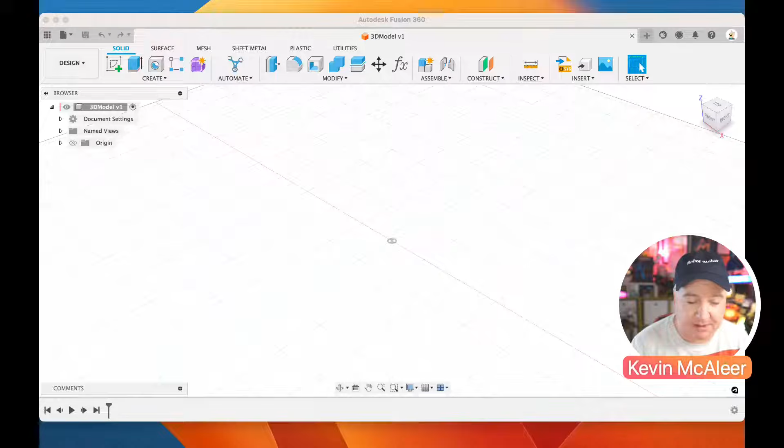So what I'm going to do is create a new component first, and I'm just going to call this one case, something simple like that. Oops, why did that go wrong? Let's try that again. Assemble new component. There we go, case.

Okay, and I'm just going to create a sketch on the base there. What I'm going to do is create the basic outline of our remote control, something like this. I only have to be crude because we're going to stitch all this together. So let's make that nice and vertical and use the midpoint to pin that to the middle there.

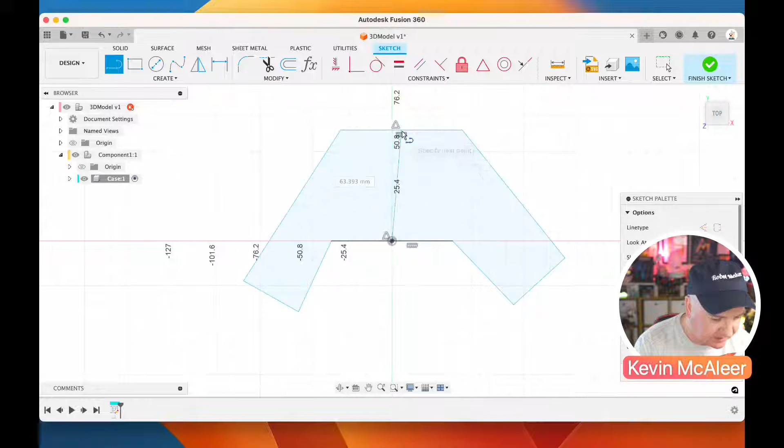And the first measurement I'm going to do is also just draw a horizontal line, not a vertical line even. Oops, it's decided to make that go all the way up there. No, we want that to come down like so. Right, and I want the measurements—these are just rough and ready measurements, something I've tried and tested. So this is going to be 57.6 millimeters. Because that's at the midpoint, that also means that point to that point is also 57.6.

We can put that there as a driven measurement. The next one there is going to be 80, and that one there is going to be 30, a bit smaller, and then this one here is going to be 40. I want it at an angle like so. And then what I'm going to do is basically mirror these over, so that is equal to that, that is equal to that, that is equal to that—that's the equals constraint there. And then let's have a look what else we need.

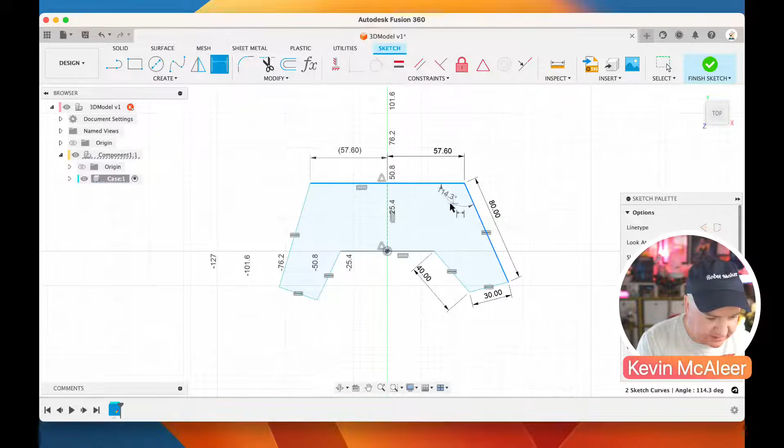We need to define some angles. So the angle between that and that is going to be 120, and that's going to be the same there, so that's going to be equal to that. And then we're going to have that angle between this one and this one be 105. I think that should therefore be the same, 105. Yep, that's a driven one, that's fine. We can leave that.

And I think that is almost it. What do we need to do? We need to define the height of this as well. So let's do there to there—this is going to be 75. There we go. Right, now that all the lines are black on the outline there, we've got a profile, which means it's a fully defined model. I'm going to round these corners out, but I'll actually do that as a second step in a minute.

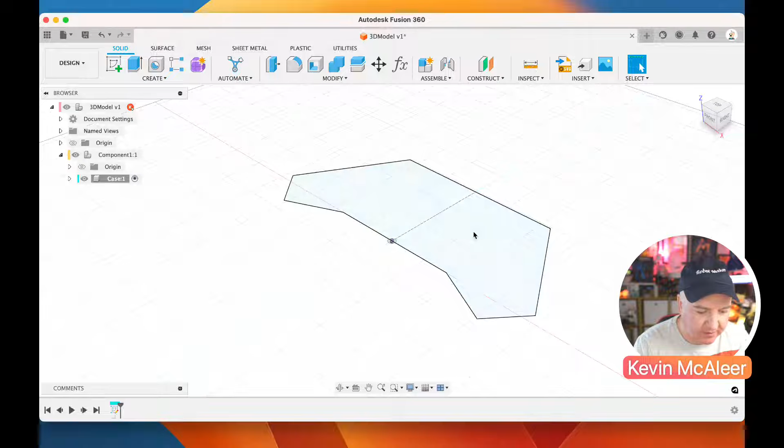So now that we've got that there, I'm just going to click on the profile, hit E to extrude, and I'm going to extrude up. Let me just see what the measurement is. I've got my notes next to me. I spent all day basically preparing my notes here. Right, so I'm going to do this 20. So it's a nice big block.

And then what we'll do next is we'll do those fillets. So if I press F and I basically just click on these, the fillet's going to be 10. So we get a nice round. If I'm holding down the Alt key there, I can actually sort of see through the model. So I can click on things that would otherwise be a bit obscured. I'm just going to move that around a bit there just to get that back one. There we go. So I've now got a nice rounded, kind of like this shape.

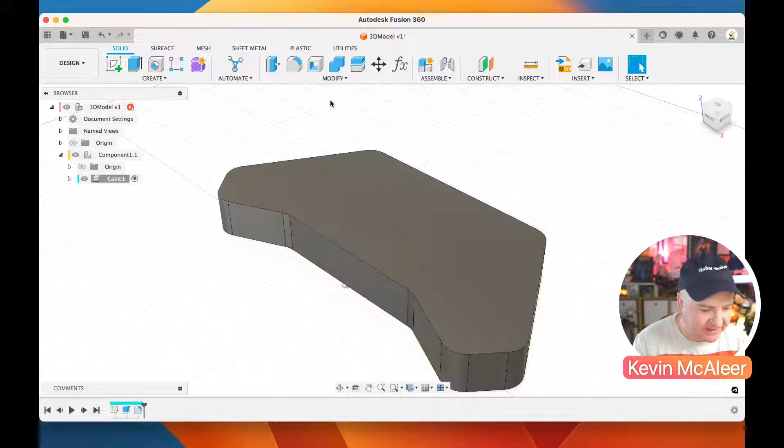And the next thing that we need to do is we need to be able to sort of eat into this. We need to give it a shell. So if I click on that shell, click on that top surface and give it a 3mm shell, it's now a hollowed out case. Very, very similar to this one that I've got in front of me here. I think that's probably about 3mm on there as well.

Okay, so what I want to do next then, let me scroll down here. I want to create another sketch inside this base here. This is what we're going to use for the basis of our PCB design. So if I click on Create Sketch in there, I then press P for Project. I'm going to pick the outline geometry, which is here. I click OK. We've now got that on this particular sketch layer,

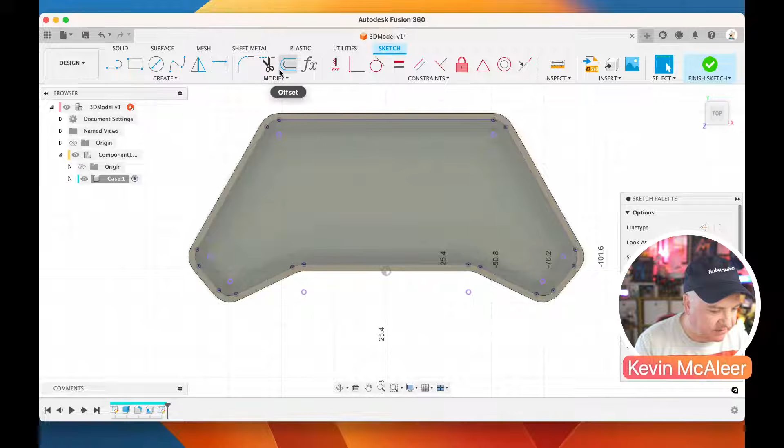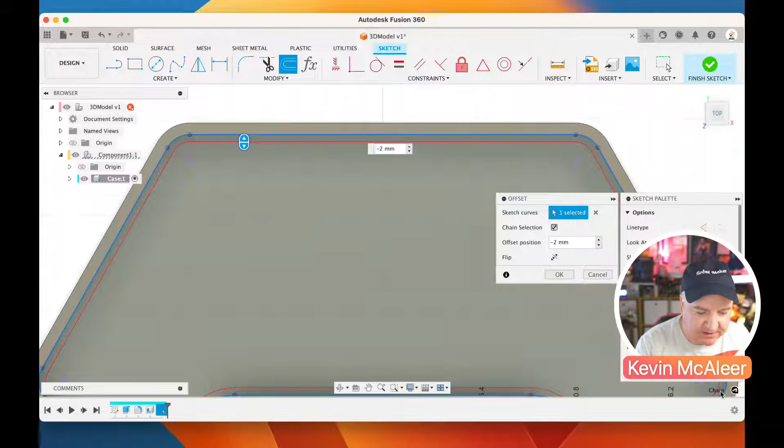and if I click on this offset and then select the edge there, I can then give this, say, I think it's a 2mm offset. And we need it to be -2, so I can click that little flip button there. And what that's actually done is it's created a new outline 2mm within the boundaries of that, so it's offset it that way. So let's click on OK there. And let's finish our sketch.

So this profile that we've got here, this is what we're actually going to turn into our PCB board. So the way that we do this, we click on the create here, we go all the way down to the bottom and we say create, and I'm going to create an associative PCB. And what this will do is it will link it back to this particular sketch. Now the only side effect of that is we can't actually place the finished PCB within this particular model. We'd have to create another model, bring this one in, bring in the PCB model and assemble them that way. It's not a big shakes to do that.

But the benefit of doing the associative is if I decide to change the dimensions of this base sketch, it will change the dimensions of the PCB. So it's got that link there. Whereas the independent one, it is a completely independent sketch and not related. It's just kind of a snapshot in time and then that's it. So I like to do the associative PCB. So it's going to say it requires saving the source. So I'm going to save that. Click OK.

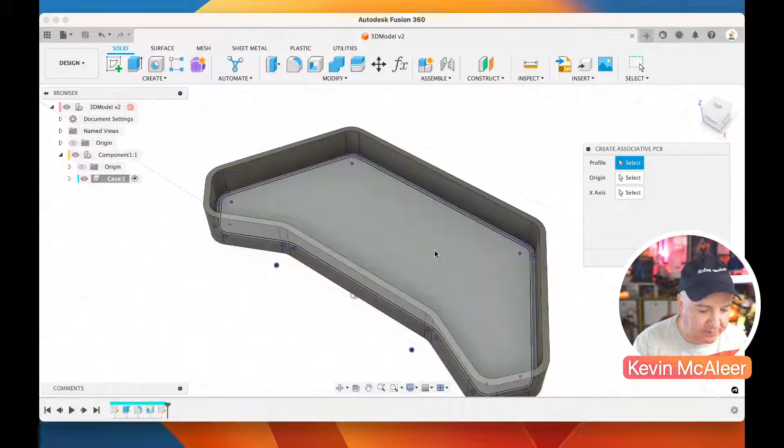And then what we then need to do is we need to define some orientation for this. So this little create associative PCB, so the profile, I'm going to click in there. So that's the offset profile that we've created. The X axis is going to be this bit here. So you can see that we have the X going along that way. However, our Y is pointing in the wrong direction. So I think we just need to flip the X, do we? Actually, no, that will be fine. So I'm just going to click OK on there.

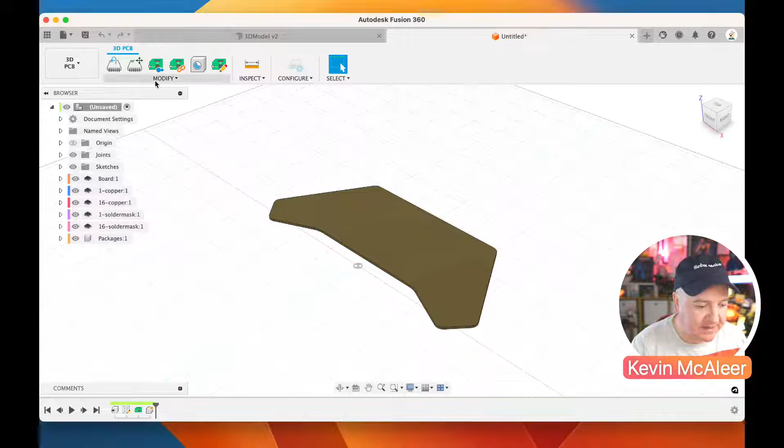That's done. And this is now gone into the electronic design part of Fusion 360. So this is what our PCB is going to look like. You can see on there, it's got copper traces, it's got solder masks and packages, but there's nothing in there yet because we haven't built them. So let's go and do that. So the way that we do this is we push this 3D design to a 2D design. So this button here will push this, and it doesn't exist at the moment.

So I'm going to click yes to create that, and then we'll go into the Design Studio proper. Now it looks a bit overwhelming at first, there's all kinds of buttons and things you might not have seen before. Don't worry about that.

We're going to go through this a bit at a time. So what I'll do is save this at this point. I'm going to click on save and just call this PCB. That's fine. You can see it says the 2D and 3D PCB documents are out of sync. Don't worry about that, it's just because it's been created and there's nothing in there yet.

Now down the bottom we have these controls for zooming in. The one I use most often is zoom to fit, and that will just zoom to fit there. Now I think that's actually upside down, so I'm going to go back to my other design.

Where is it? The 3D design. I'm going to click on... well, actually no, I'm not, I'll leave that for now. But basically, when I said the X was pointing the wrong direction, or the Z, it's essentially just done it upside down. It doesn't really matter for what we're doing today.

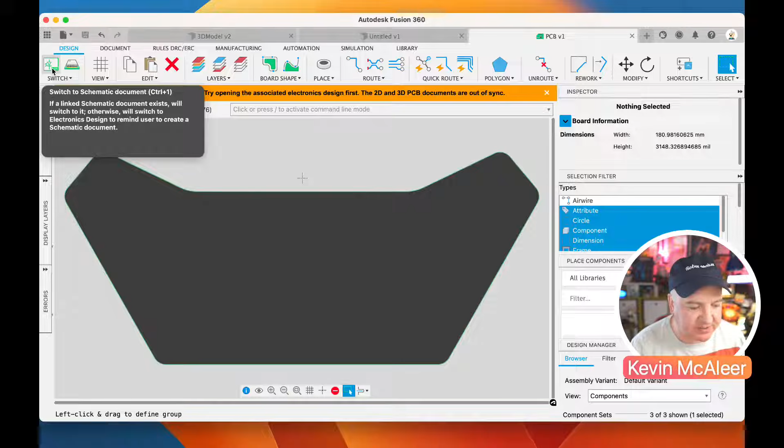So let me look at what we need to do next. We need to now create the schematic, so I'm going to go over here and click on switch to schematic drawing. Now it doesn't have one, and it'll complain that we don't actually have one created yet. So what I need to do is go and create a new electronic design.

If I go up to new electronic design, it will create a new blank document. Now this is kind of like a binder that holds all three documents together - it'll have the 3D model, the 2D model, and the schematic in there. So what I need to do is create a new reference to a new schematic.

Let me find where I'm up to here. So I'm going to reference the PCB design - see this button where it says reference the PCB document? If I click on that, I then go to the place where we've saved this. We call this one PCB live stream, and we can link those two together, and now we've got that linkage there.

So if I now click on switch to schematic document, it now knows what to do. And if I go back to that document with the 3 tabs - there we go - you can now see we've got the board layout, the schematic which hasn't got anything in it, and our 3D model which we haven't looked at yet either.

Okay, so I'm going to go back to our schematic. I'll be jumping backwards and forwards, just bear with me, this is how we do it. Right, let me just get rid of that. Just need to put myself into do not disturb. There we go. Okay, good, you can't see that.

Right, so I'm going to save this. Let me go back to that version there. I'm going to click on save - we'll just call this one Electronics Design Remote Control, something like that. That now means we've got everything saved, just in case Fusion 360 crashes, because sometimes it does do that and it's quite irritating.

Okay, so what we're going to do next is create our schematic. We're going to put in some components, some buttons, and the Raspberry Pi Pico, and a power connector, like a JST PH connector, for example.

So let me just scroll up a little bit. I've got a box of the kind of buttons I want to use here - these are momentary tact switches, you might have seen these before. I don't know if I can get that to show on camera, but these are very small little push buttons, so I've got a whole box full of those, that's what I want to use. You can either have surface mount ones or through hole. I'm probably going to use through hole for this entire build because it's just easier for me to solder - I don't have all the fancy air guns and things for surface mount.

Okay, so what we're going to do then is put the buttons onto the PCB, onto this sketch here.

We're also going to create our own Raspberry Pi Pico because that doesn't exist in our library yet. So I'm going to show you how to do this. So over here on the left hand side, we've got this idea of libraries. If I click on this little library manager button here, you can see that we have quite a few different libraries that we can pull things from.

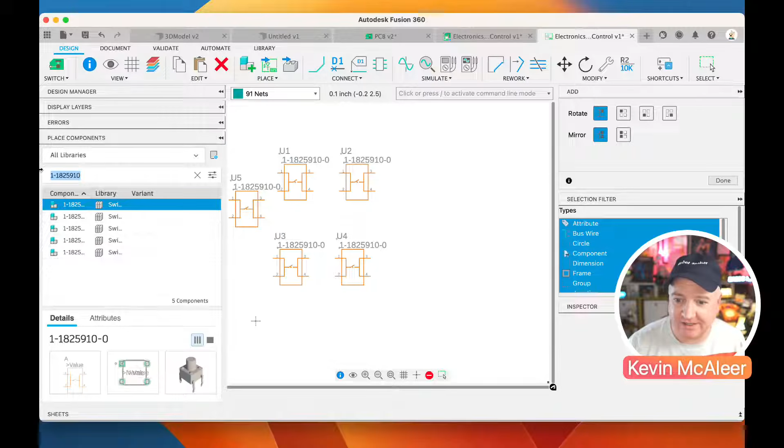So the first thing we want to do is create what they call a library. A library stores components. So I'm going to click on New Electronic Library. We've got these different views on this library here: components, symbols as it calls them, footprints, and then the packages. So let's start out with the component. We're going to create a component, and we're going to call this one Raspberry_Pi_Pico_W. And that's going to represent this Raspberry Pi Pico that we have with our Bluetooth controller on it.

Okay, so now that we've created that, we need to build some symbols for this. See these buttons up here, we have new component, new symbol, new footprint, and new package. So I'm going to click on new symbol. I'm going to call this one similarly Raspberry Pi Pico W. So now in this little symbols tab, you can see that we've got this Raspberry Pi Pico. Right, this is where it gets really cool.

So what we want to do is we want to place 40 pads or pins for the Raspberry Pi Pico. The way that we do this, we will click on this button here that says pin at the top. We click on that, we get this line, and it has a line and a dot and a label at one end. I usually do them spaced apart, sort of 2 blocks. And you can see that there's this grid settings down here.

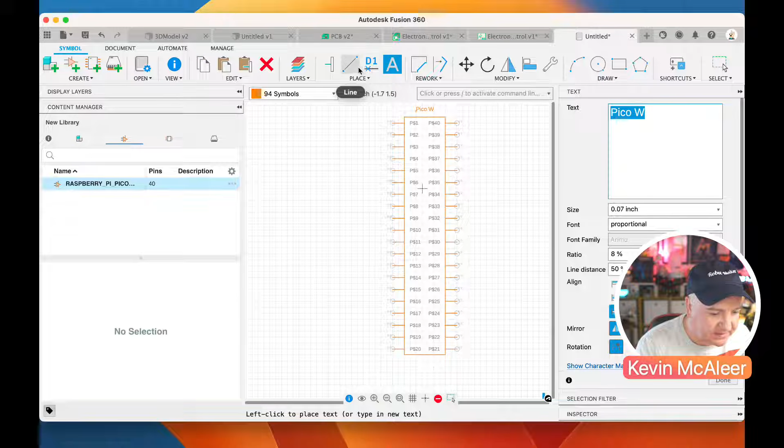Right, so what we need to do next is name the pins so that they actually make sense in the context of the Raspberry Pi Pico. So if I click on this name button here, this D1, and I click on that thing there, I can actually then start to name these. So instead of it being P$1, I can actually call this one GPIO 0, because that's what it is on the Raspberry Pi Pico. And then I can do the same, so that's GPIO 1, and see, it's automatically suggesting the name there.

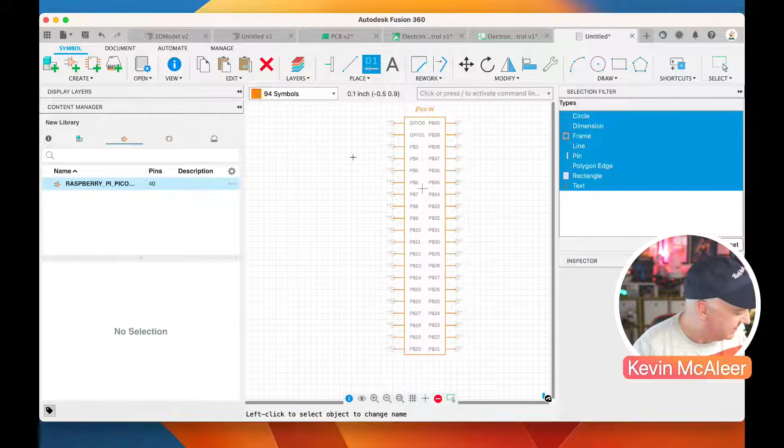So this next one is actually a ground pin, so it's going to be GND. The next one is going to carry on with the GPIO numbering. So if I just press that there, we get GPIO 2. And then it goes all the way down to GPIO 5. So let's just quickly speed run this if we can. This is the kind of boring bit. And then that one is GPIO 5. Then we have another ground pin. So it doesn't matter at this point that it calls it ground 1. That doesn't really change anything at this point.

So this is going to be GPIO 6, GPIO 7, GPIO 8, and then GPIO 9 is the last one before there's another ground. Then we have another ground pin, so this is going to be ground 2. We can actually just jump ahead and put the grounds in. That might be a bit easier. That's going to be ground 4, ground 5, ground 6, and then that one's going to be ground 7. Okay, so that one then needs to be GPIO 10, I think. Yep. GPIO 10, GPIO 11.

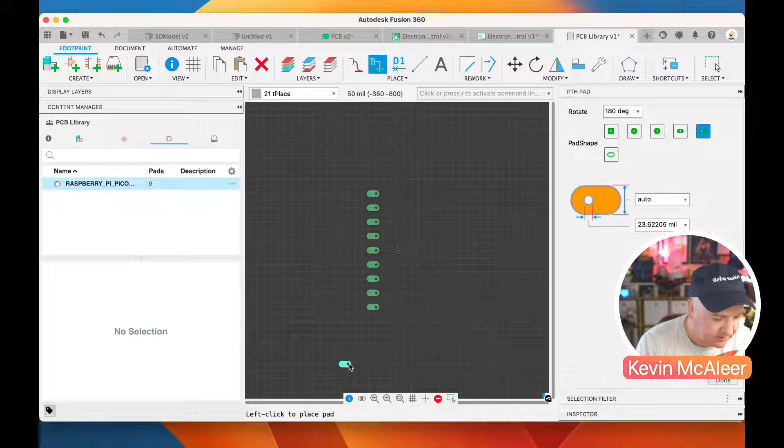Now, unfortunately, it doesn't actually number these, so I'm going to count them up. So we've done, what's that, 5, 6, 7, 8, 9, 10, 11, 12, 13, 14. Let's just do that, and then that. 14, 15, 16, 17, 18, 19, 20. Let me just count them again. 5, 6, 7, 8, 9, 10.

Right, that's 10. Now that X there, that crosshair, that's the origin point, and it is actually quite important that we have that origin point somewhere that makes sense. So I'm going to have that origin point as we look at our physical PCB, on the bottom edge in the middle there.

So that means I need to press escape to get out of that pad placing. I'm going to select all these, and I'm just going to move them up so that they're kind of like that there. Again, if I press zoom to fit, we can see how that's going to look.

Now I need to do the exact same thing with pads on the other side. I need to make sure that they're flipped the right way round. I think they are there, so I'm going to guess it's about there.

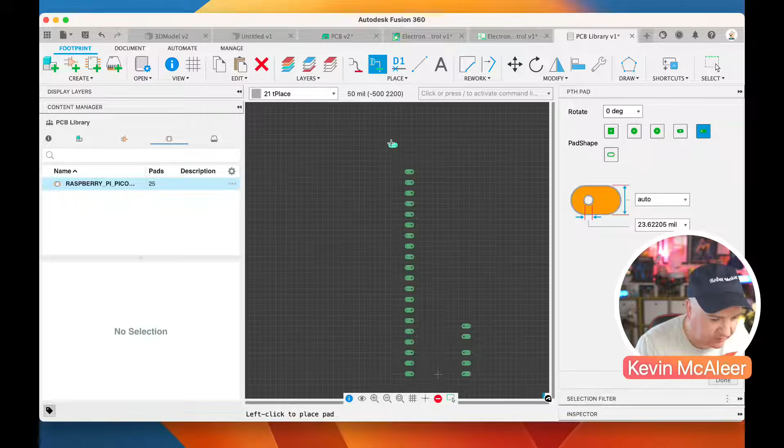I always get the spacing wrong, but we're going to come back. I did that one wrong as well, so we can use that move tool to just grab it and move it like so, and then just move that one there. And then let's just grab that and move that as well. There we go, I was clicking in the wrong place there. So that should be there.

Right, let's get back to placing these, and then we can get on to doing the next bit. So there we go. Nearly done, 2 and then 1. Okay, so that's our pins.

So I'm now going to save that. Let me just click on save. And we want to next create the package. Make sure I've not missed any steps out there. No, that looks good.

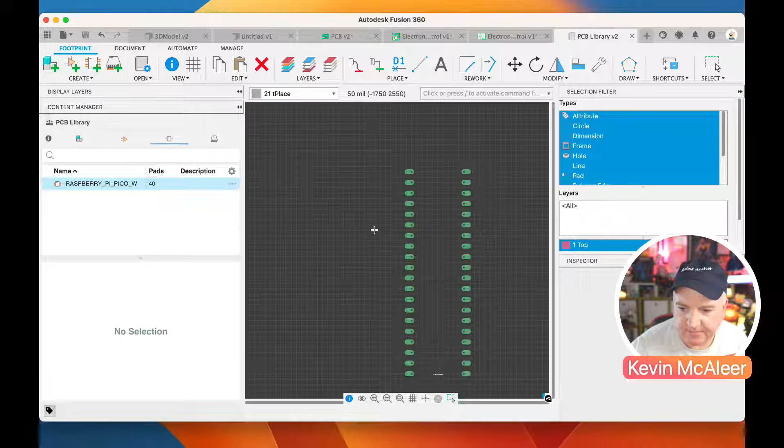Okay, so we just need to create a package next. The package sent me into the 3D Studio. And now at the moment, thanks Bryce for subscribing to the channel. I'm just going to hide off the overlays for a second because I find them a little bit distracting. There we go.

Okay, so we haven't actually got anything interesting to put into the package on this side at the moment. So what we can do is, if we were designing say a PGA or a BGA, a ball grid array, we could click on that one. If we were creating a chip, we could click on that button there. But we're not doing that. We're doing something a bit more fancy than that.

And what we're actually going to do, we're going to cheat for the 3D model. Raspberry Pi have already created the 3D model, so we're actually going to go over to the Raspberry Pi website and grab their 3D model so that we can very simply put this on our screen. So let me just go over to the website.

Let's go to raspberrypi.com. If I go to hardware, let's click on that and go for hardware. I'm going to find the Pico, which is there, and if I scroll down to this document section here, you can see they have these step files. So there's a step file there for the Raspberry Pi Pico W. If I click on that, it will actually download the step file.

And if I come over to Fusion 360 and I go to File and Upload, I can upload that file. So if I go to Select Files, if I find it in Downloads, if I find that step file that we just got, you do actually have to unzip the step file. But if I just go for... is it called Step?

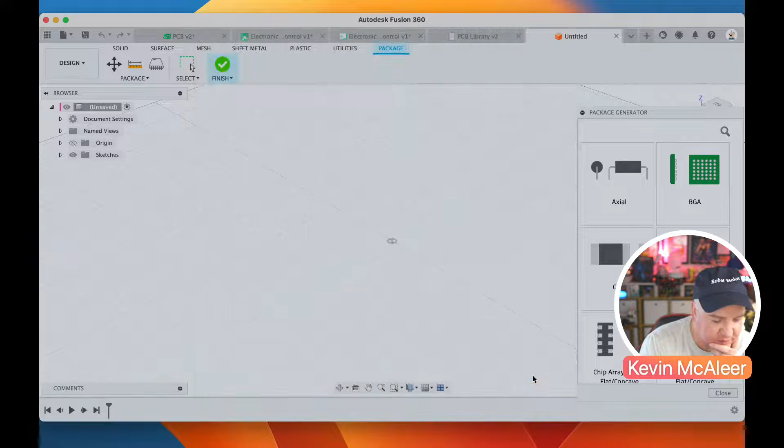So let's try, let me just try uploading the zip file. I don't think that actually works properly, but what I'll show you is you basically just upload the STP file. If I go over to here's one I prepared earlier, and I go into here.

Then we have this Raspberry Pi PicoW file, and we can actually import this into our design. So if I click on Insert into Current Design, I actually have to save the design before I can insert something. So let's call this one PCB 3D model. I should have called it Raspberry Pi 3D model to be fair, but let's just insert this into the current design. And we've now got the Raspberry Pi PicoW.

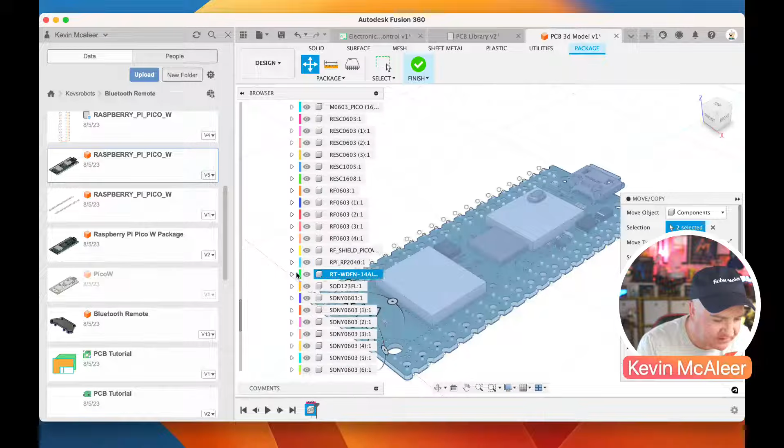They've got this really weird artifact that I noticed on here. That block there shouldn't actually be on this model. I think it's a mistake. So if I go here and just find it, there it is. If I just disable that, that's actually what the Pico should look like. But I'm going to place that there.

I'm going to click on Finish for now. And what we need to do is go back and close that, and do some extra steps on here, I guess. Right, so...

Yes, so I think what I should do, instead of doing the new package, if I go back to... let me find, here it is. So I was saying a bit before about this gets a bit cluttered. I'm going to collapse that one there. It's this one here I'm actually interested in. So if I go back to our Raspberry Pi Pico and I create a new 3D model from there, that's really what I should have done.

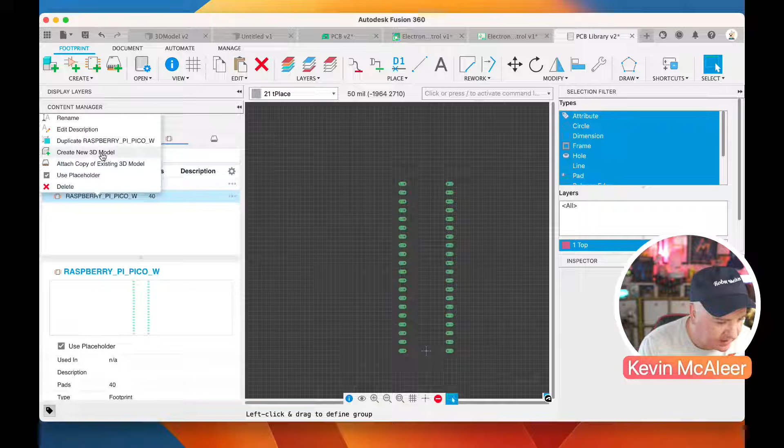I'm going to click on Save. You can see here, these are the pads that we created a moment ago. So this is really where we should now import that Raspberry Pi PicoW into our drawing. So let me do that. And that will tell us whether I've got the spacing correct.

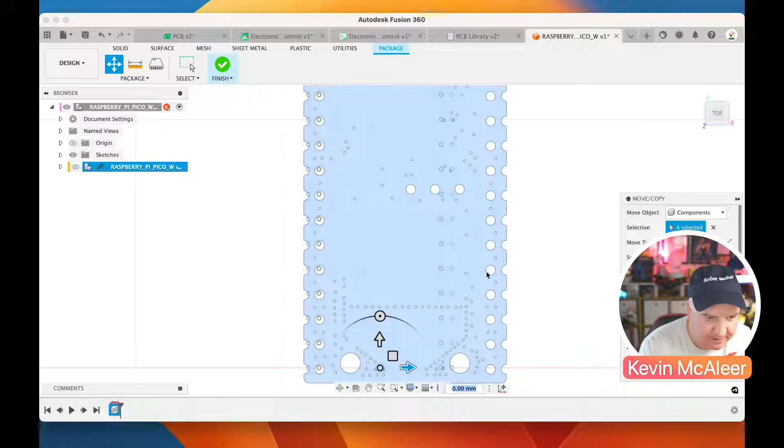So if I go to the top view, I want to see these are not correctly aligned, and maybe they're not correctly spaced. So I'm just going to move this model about until they fit like so. Let me have a look. So yeah, I can see that if I hide that model, these pads here should actually be a couple of blocks that way.

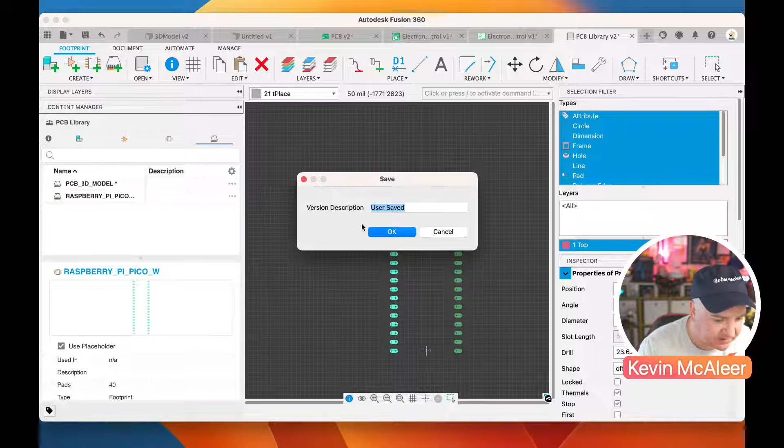So what I will do, I'll just say OK for now. I will go back to our 2D model, and I'm just going to grab these and just move them like so. I'm just going to move them in the opposite direction as well. That might be correct, so let's just save that. I'm then going to go double click on our 3D model.

I think we go back there. We can now go back to the top and see if these now correctly align. They're nearly there, I think they need another push across. The thing that's confusing me is I brought in this model here and it's already got those pads on it, and that's not great.

So what we're probably going to do is just remove that. Let's just delete that and then bring a nice fresh one in. So let me find the Raspberry Pi PicoW. Is that the one that we brought in? Let's try that one, let's insert into current design.

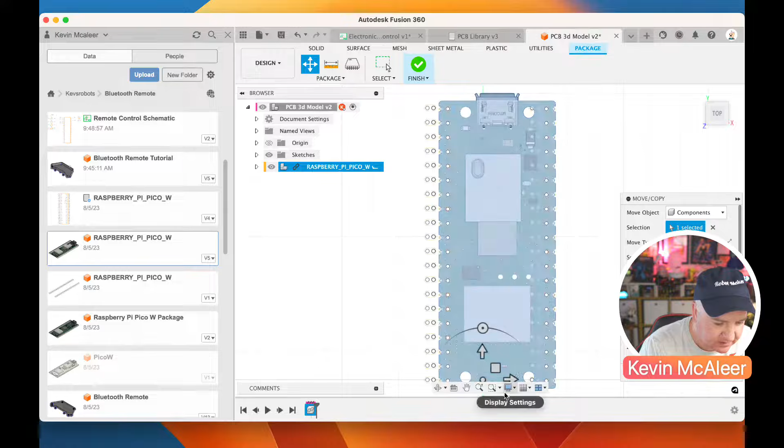Yeah, that's better. So now if I move that... no, it's still got these other pads on from another model that I did. I don't really want them to be there. That's irritating. Okay, well, we'll just have to stick with it then for now.

But what I can see is that they're still not quite right. So if I click OK, I hide that. Okay, let's hide that, that's what I'm trying to see. You can see that there's got two sets of pads there, and that's not helping me understand what's going on there. Okay, so let me just finish that.

And I think they still need to be moved out just a little bit more, so let's just do that. It's wider than you think. And maybe that is correct. So let's try that, save that, close that dialog and then click on here again just to open it up.

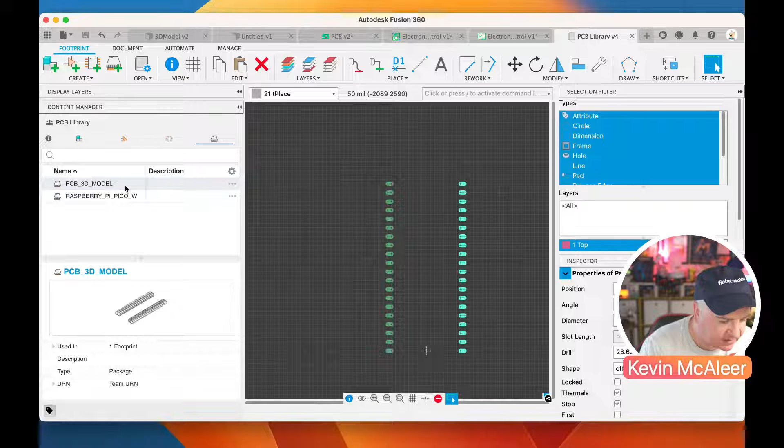And yeah, they should be over each other. So if we go back to the Pico, and let's just have a look where that is now.

I'm going to leave that for now because it'll take all day, but basically we need to get these pads aligned with the 3D model. We can either build a 3D model on top of these pads, or just bring in an existing 3D model, but you get the idea there.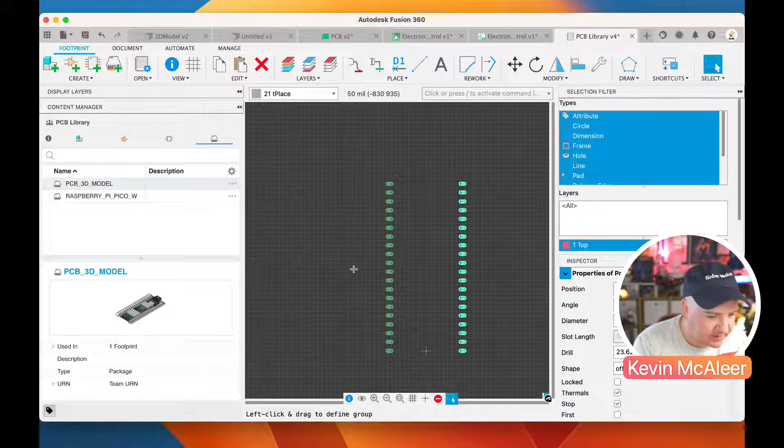What we'll do next is join the pads to the pins. Let's go back to the package, which is this one here. Which one do I need to go to? Is it the component? Yes, right, so now I'm back on this component.

I'm going to click on this Add button, and we can add that Raspberry Pi Pico symbol we've just created onto here. I'm just going to create one, I don't need more than one. And it recognizes now that we've got 40 pins available. We haven't connected up the pads yet.

So if we click on, I think it's connect? No, we need to add a local package first. So if I click on this, we can click on our Raspberry Pi Pico, click OK. Now we can actually connect up the pads to the pins. We've created pins on our schematic and pads on our 2D design. We now need to match these up.

The way I found it easiest to do this is to start with the V-bus and V-sys. V-bus is the very top, pin 40, so we append that to our list, connect that up. 39 is V-sys. Run was pin... what was that pin? Pin 30. So if I find pin 30, connect that up.

Then if we find the grounds, we can do those next. Our very first ground is connected to pin 3. Our second ground is connected to pin 8. Our next ground is connected to pin 13, I think that is. Yep, pin 13. Our fourth ground is connected to pin 18. Then on the other side it's 23.

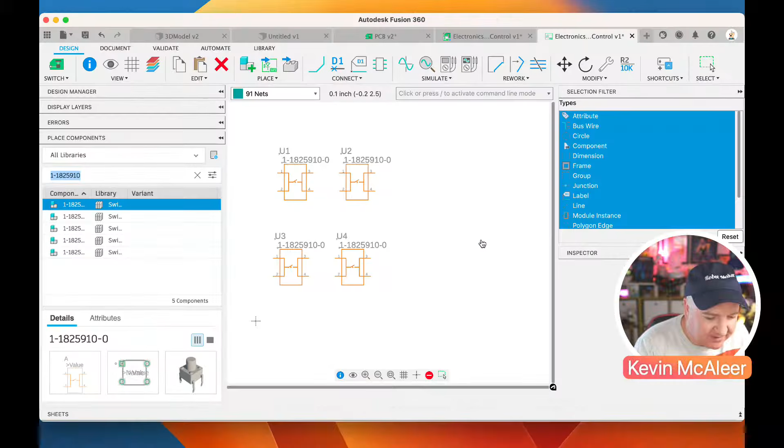Everything else we can quickly redo, but I think we've... Actually, Fusion does save a lot of the files in the background, so once it's done its crash analysis, we can quickly get back to where we were. But it is something that happens - I guess it's because they've joined two very different packages together.

Let me just load up Fusion 360 again, and once that's loaded, we can get back to it. So the lesson there is always save your work.

Like I said, it will have detected there were some crash files, and we can just go back into them and open them up. But now we can use that Pico we just created in our schematic, and there isn't much more to do from the building the schematic side. We can now get into placing our components, wiring them up, and generating the actual output files that we can send off to somewhere like PCBWay to generate our physical real-life PCB.

Okay, so I'll just wait for it to come up with that crashed dialog. There we go, so we want to have that one. Let's open up that, and let's open up the others as well. I think it's the other two that are there.

Wait for it to do that. It says if you want to access them later, file and recover documents. Okay, let's go to file.

Let's just open up the other ones that we had. I did save them in that folder called PCB Livestream. Let's open up our electronics remote control, let's go for that one there. Yes, let's open up that one, thank you.

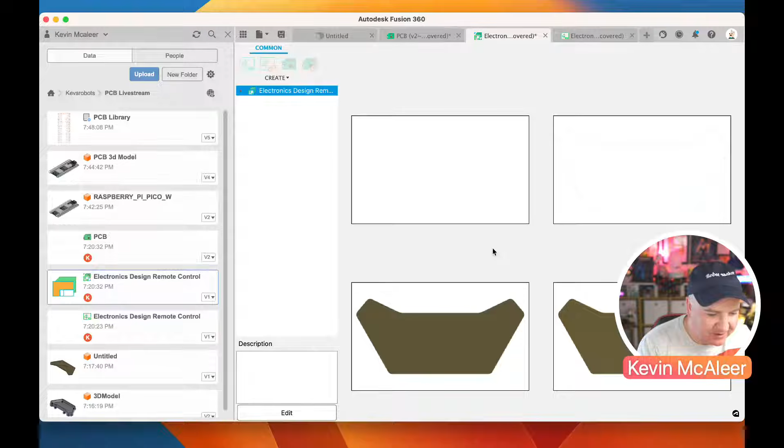So Fusion is quite helpful with this as well. It recognises if there's a saved version because something crashed. Let's get rid of that panel. Right, so let's go back over to our schematic.

Here we go. So now if we go to this library and we search for Raspberry Pi, we should actually find that one that we've just created. I think I called this one, it's in the library, PCB - this is the one we've literally just created now. So if I double click that, look what happens when I drag that across. If I just zoom us out a little bit, zoom to fit, you can see now this is the PCB that we've literally just designed there.

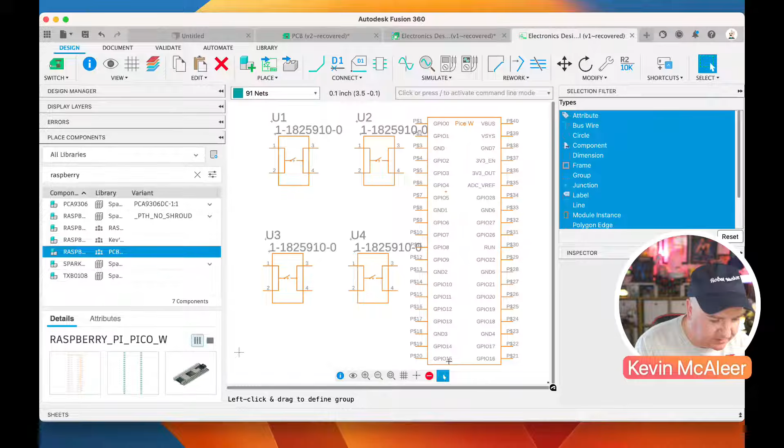So we can move this about, I think it's the origin point. Gone for this, I'm just trying to grab it and move it about a bit. Well, it's complaining about that - I can't remember where it did it, was it the bottom? Yeah, that is another irritating thing about Fusion, it doesn't tell you where the actual origin point is, but yeah, you get the idea. We can probably move these other things about instead, actually, that's probably an easier thing to do. Let's grab them, and there we go, the center.

So what we want to do next is just connect up our pins to our buttons. That's as simple as connecting things up, so we have this net function to do that. We can either just click on the module there and then click over to where we want that to be, so like GPIO 0 would connect to button 0, for example. Then the other side, that would go to ground - any of the grounds would do. But our diagram is going to get pretty messy if we do this with everything.

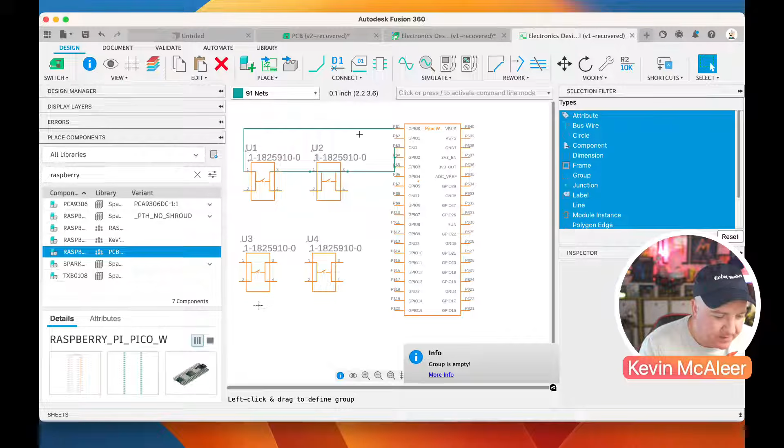So, correct me if I'm wrong if you're an expert in PCB design, but I don't think you connect up all the - basically it's going to undo what I've just done there. So what we would typically do is we would create a little line from here, and then we would name it with this name thing here. I could just call this one like GPIO 01, 00, for example. And then if I go over here and do the same thing to this button, and name that wire the exact same thing, so GPIO 00, it will say would you like to connect this net to that net there?

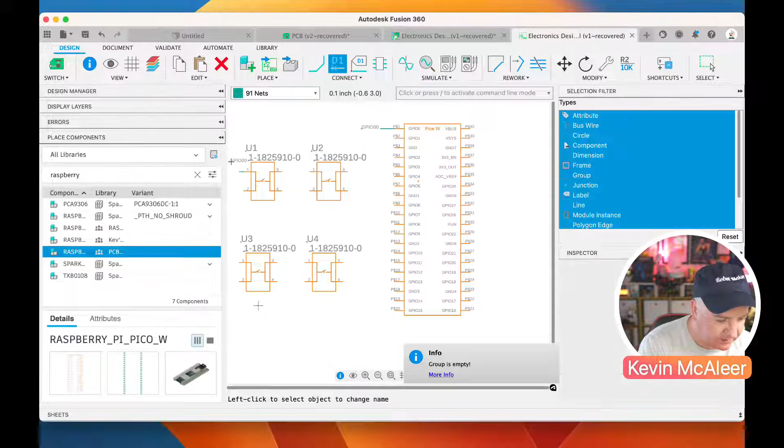If I click yes, then there's a hidden wire that goes between that one, and it just creates nice and neat diagrams. So we can do that, and I think we do what we should have done when I clicked on the name function there - it places the label as well, so we can just put the label next to it, and similar with that one, let's place the label wherever. Let's probably just move them out of the way so we've got a bit more working space, and then we would continue in the same vein wiring all these up.

So I'll just do a couple more, let's just do the rest of the buttons very, very quickly, and we'll also do the ground as well. So if I go over here and just name that ground GND - I think I accidentally didn't place the label there. There we go, and then let's just name that one more time, so that's GND.

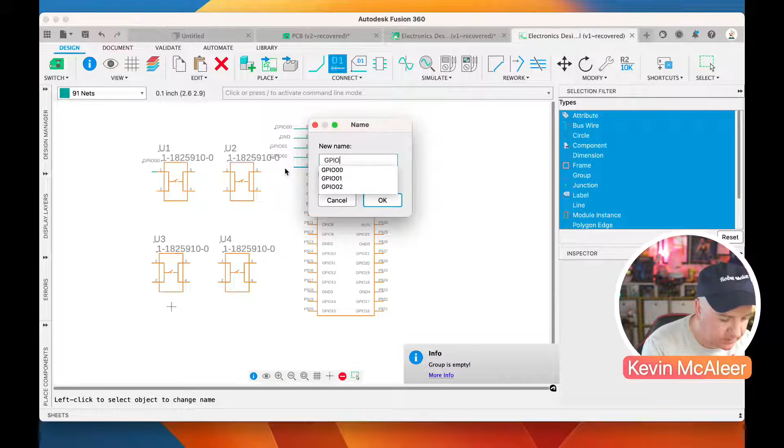Okay, there we go, and then that one's going to be GPIO 1. That's going to be GPIO 2, and that's going to be GPIO 3. Okay, and then if we just move all these out a little bit, we've got a bit more space to play with. Need to move my little label as well because that didn't move along with it.

There we go. And what we would do next then is - so pin 3, any of the pins on the right hand side are ground pins on these buttons, on these momentary switch ones. If I just do a little line, I then name this one to be GND, it will then connect up this ground to that ground over there. It recognises that they're actually the same thing.

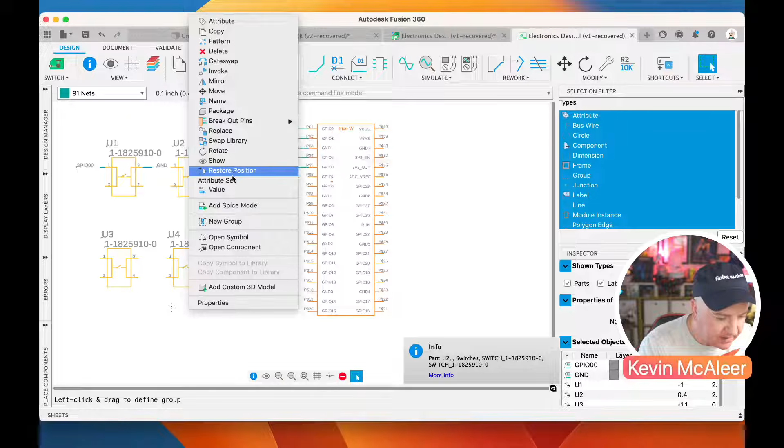Now, just for the speed, I'm aware of the time ticking against us here. So what I will do next is I'm going to create a box around all these objects here. Let's get the label in as well. If I right click on that there and I say new group, I can call these buttons, and we get a nice little dotted line, and it's a bit neater and your diagram can read a bit better.

We could also name these if we wanted to. So instead of being U1, U2, U3 and U4, we could have them named as up, down, left and right if we wanted to. Okay, we would then continue with the rest of the things. So if we had, for example, let's find some power. We do need some power symbols in here. Let's grab, I'm going to say 5 volts. So let's just grab 5 volts, put that over there. That's going to be plus 5 volts.

We also need to have a ground, so I think if we scroll down, there's a GND as well. And you can choose between various different libraries depending on how you want the symbol to look. So that one, for example, has got like a bar at the bottom. This one has got like a little arrow. I quite like the arrow one. So if I double click that and then come over here, we can have that added to our diagram.

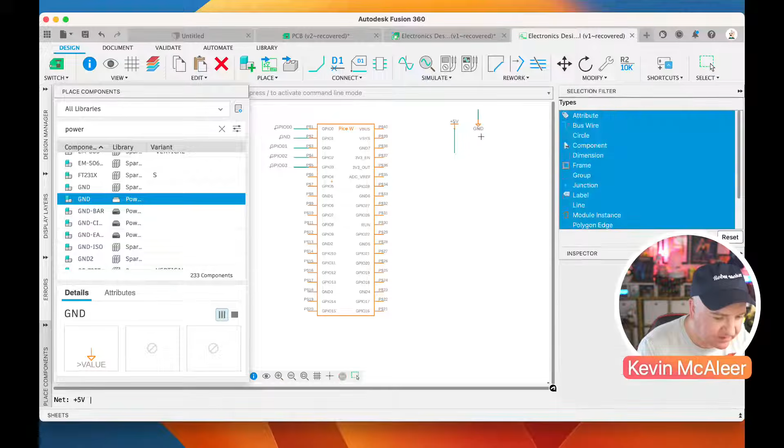And we can also do things like just connect up the 5 volts and the ground. Let's just name that. Plus 5 volts is fine there. And then let's just name that one GND like that, and that will also connect up any magical air wire over here. We did say we would put a power adapter on as well. I think we're a bit pushed for time, so I'm going to actually leave that one off, but you would essentially come in here and just search for the kind of connector that you are after for that.

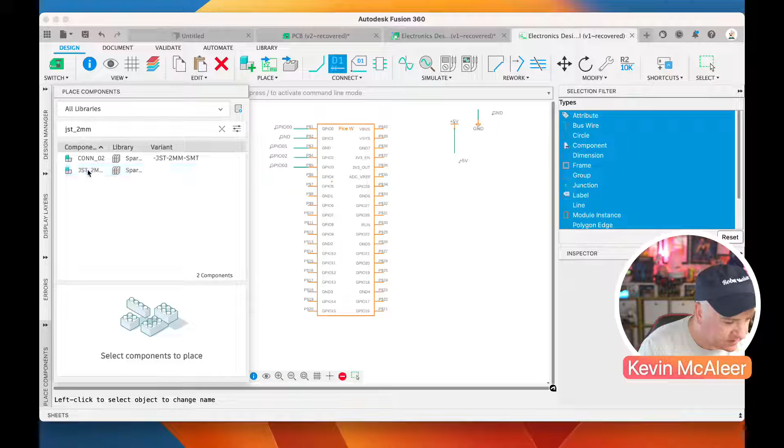I'll see if I've got that on my notes actually, to see what that was actually called. So I think let's call this one JST. Let's just see if we've got that very quickly. JST 2mm, is it? Something like that. Let's see what model we've got there. It doesn't have a very good 3D model, this one, but it's kind of like what we're after.

And we could actually just join these up directly. So that's the plus 5 volts, and that's the ground going to there. So that's probably not quite what I'm after. I probably could do with rotating this one round. So if you right click, you can actually rotate the symbols, and it will keep rotating each time you click on it as well. So you can get it to be the orientation that you want. So if I did it like that, for example, I could have this.

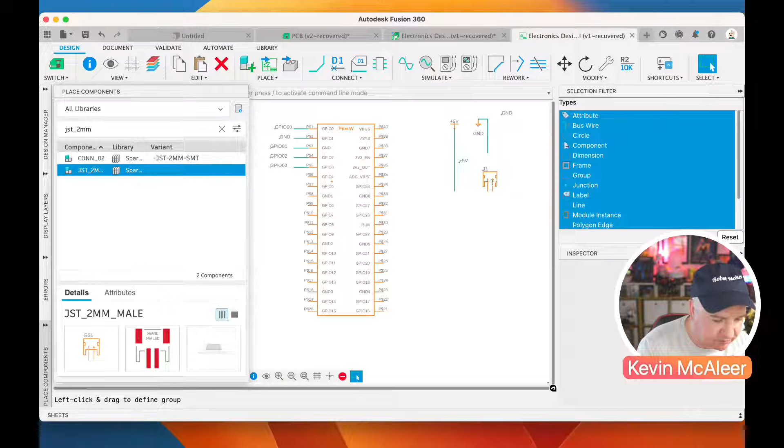I'm not happy that that net is actually going to the wrong, it's going to both of them. So let's just go to the delete function and get rid of that. Get rid of that little air wire there as well. A little net. And I'm also going to rotate this one round just to make it a bit easier to connect things up. Of course, it always rotates the way I don't want it to. Right, so the ground is on the top. So if I click on that little net button, I can continue that net there. And then the 5 volts is there.

And we can move these around if we want to make them a bit tidier. We can do all that kind of moving things about as well. There we go. Right, that's probably enough for that. Let's just save that again. And what we're going to do next is we're going to move over to our layout. Just making sure there's nothing else we need to cover off there. Right. So now we click on this switch button, switch to PCB document.

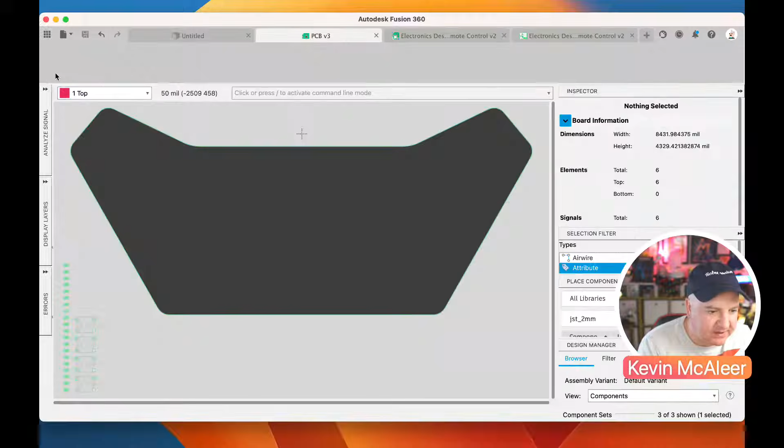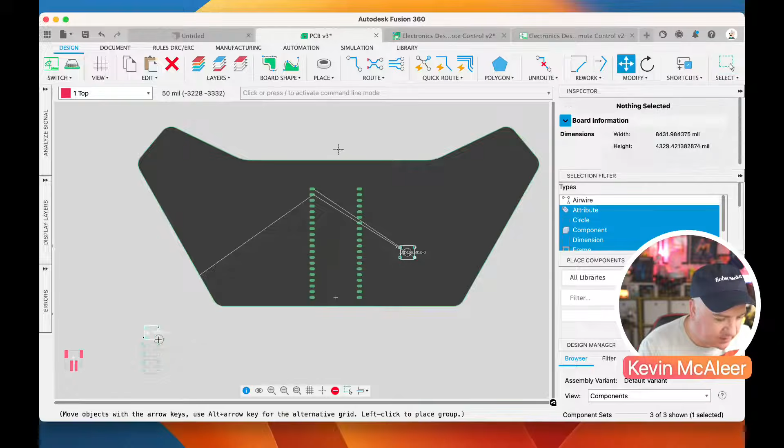So if I now click on here, here is our PCB design that came from that original 3D model. And over here on the bottom left, if I zoom to fit, we've got our Pico. So we can grab that and we can shove that there, for example. We've also got our buttons, so we can place them where we want them to be. And we can start to, in fact, I've kind of got my PCB board upside down actually, so that's not helping very much. So if we rotate this round, I'm just right clicking to make it rotate.

Try and make that rotate again. Just keep rotating for me. Rotate. There we go, that's better. Oh, I didn't realise you could do it like that. Okay, and if I just drag that over here, they're now in the right orientation.

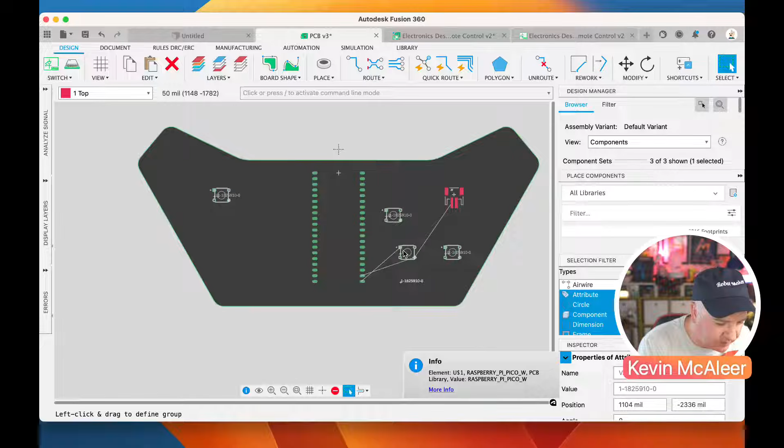So the very first one, I've just moved the label there by accident. What I'm trying to do is move the button itself. So let's zoom in so we can see what we're doing. Where's the origin for the button? That's the origin for the label, and the button is actually there. So this is our very first button. Let's place that one there.

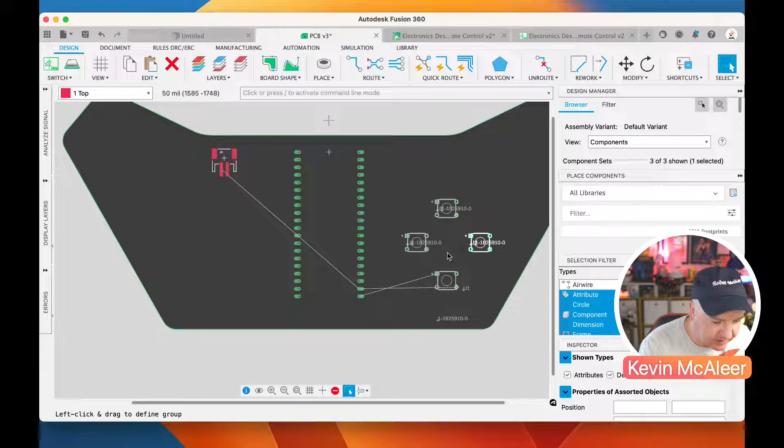The second button then, did we actually connect that one up? We haven't connected up these other buttons yet, but let's place them roughly where we want them to be. I want that power thing to be kind of over there because I want the battery to be in this part of the controller. And let's put this one roughly there. We can move these about in the 3D model as well, so we can get them exactly where we want, but that looks about right.

So I can see here that these are air wires. What we need to have is the air wires for all of them connected up to the correct place. So if we go back to the schematic diagram, clicking on this button over here, we can do the same thing, then just click on that little net thing. Let's click that there.

Okay, I've got that one there. Let's do another one for the ground. Let's do one there, one for the ground, one for the ground, and one just down there. Make it a bit easier, and then let's name these ones. So that one is going to be GPIO 1. Yep, we want them to connect up.

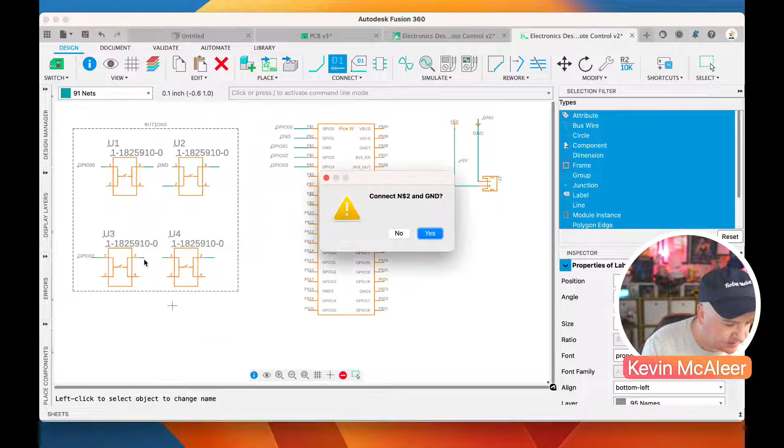That can be just, sorry, I just got the little label moved the wrong place. Let's go back and name this one. This is going to be a ground, GND. Yes, I want to connect it. I want the little label to be next to it. This one is going to be GPIO, let's name that one GPIO 3.

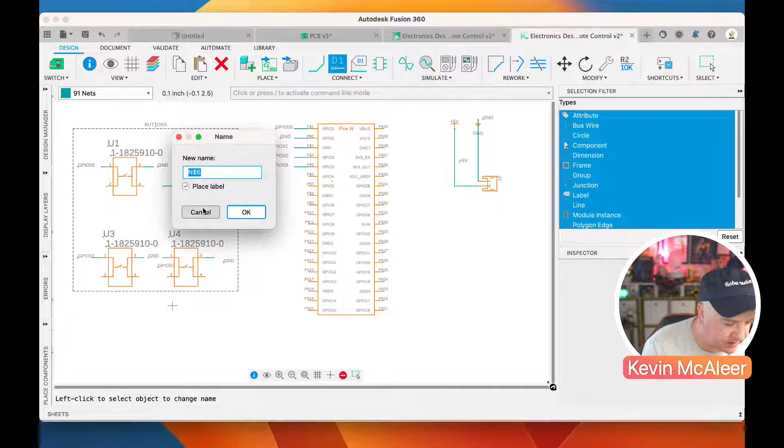Yes, let's put the little label next to it there. Okay, and then this one is going to be ground. Yes, that's going to go over there. And then this one is also going to be a ground. Yes, label next to it there. And then that last one, let's name that. That's going to be GPIO 2, I think. Yes. Click.

Okay, so if I now just save that, and we click on the switch to the diagram, you can see now that these air wires are connecting up everything. But these are air wires, not actual physical traces. What we need to do next is click on this route button, and then we can actually draw out the route as we want it to appear on our PCB.

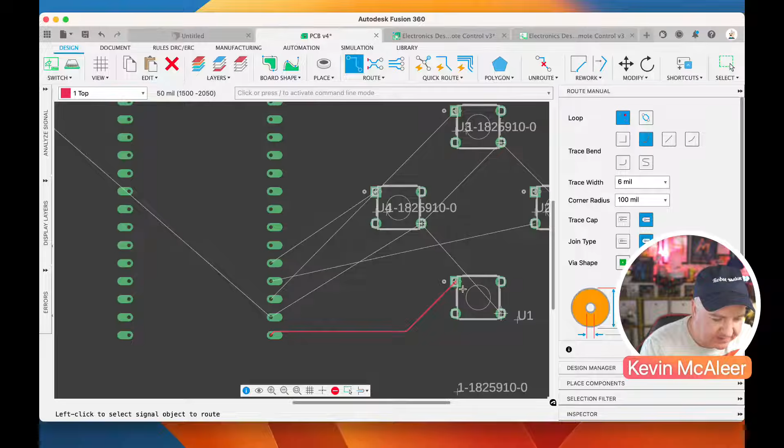So for this, I'm going to zoom in a little bit so I actually get it to connect onto the correct place on that pad. Let's do that for all of the correct ones. If I click on the next one, the second one, that's going to go to there. The third one is going to go to there, and actually the third one is the ground, isn't it? Let's undo that one. It's that one there that needs to be done next.

Now also notice that there's these different layers. On this layer thing here, we're on the top layer at the moment, and that's correct for placing routes. But when we're placing other things, we might want to change what they are. Now that's going to be a bit fiddly. We'll have to go round this one down there. And then the final one is going to go over here.

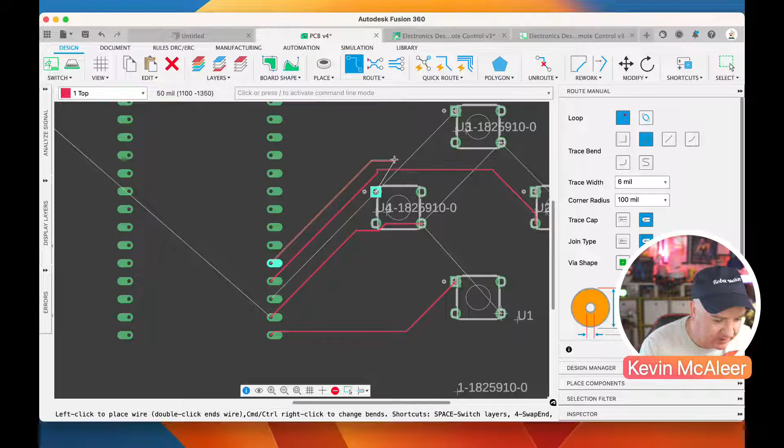So I guess I probably need to move that button around, otherwise it's going to get fiddly. You see how it's trying to push its way through an existing route, and you can't do that because they're all on the same layer. So what I'll probably do here is just move this button to a different location. Let's move this one out a little bit. Let's move that button over there maybe, and then move that button down there.

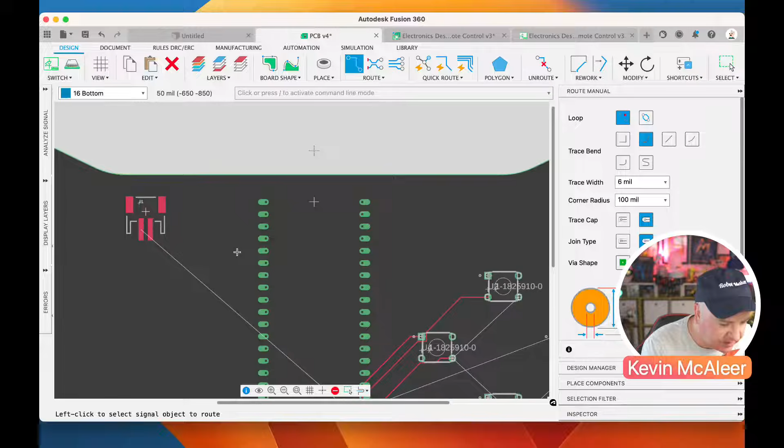Okay, maybe that will work a bit better from a point of view of routing. And then let's go back to our route, and then let's just join up that last one to there. Okay, so that's all the positive connections made up. And we've also got that voltage coming in there as well. So that's interesting because that must be the ground, is it? Yeah, that's the ground that's going to that pin over there. I don't think that's the correct pin for that to connect to, so we'll have to fix that, I suspect.

Yeah, I think I've swapped the left and the right buttons around. Somebody's just saying there in the comments.

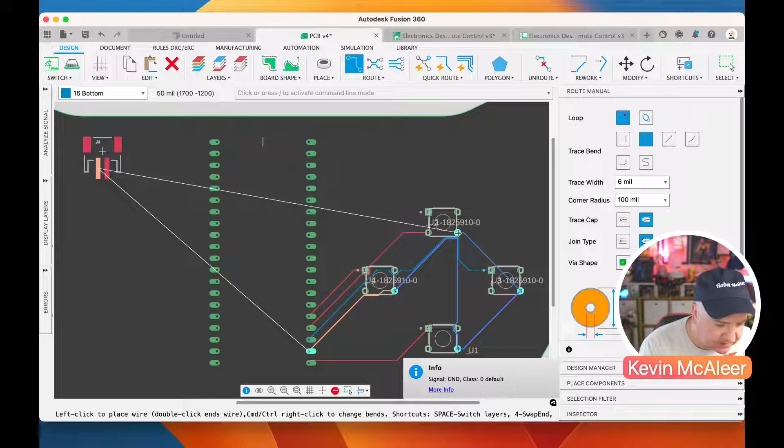But what we need to do next is, you can see there we're on the top layer and we're drawing in red. If I press the space bar, it'll toggle it now to the bottom, and we can now connect up things on the bottom of the board. So we can now connect up anything that we want to be connected. So for example, we can connect up all the grounds where we want them to be, like so. I think that one is also connected to there. That is also connected to there. And that is also connected to there. Like so.

Okay. Now, if we want to check that we've actually done our wiring correctly, there is this rules, which is the design rule check, I think it is. So if we run the design rule check, it will tell us if there's any problems, and it's saying there's an overlap. The overlap is here. And what's happened is I'm on one layer and I'm trying to connect to a surface mounted pin on another layer, and it doesn't like that.

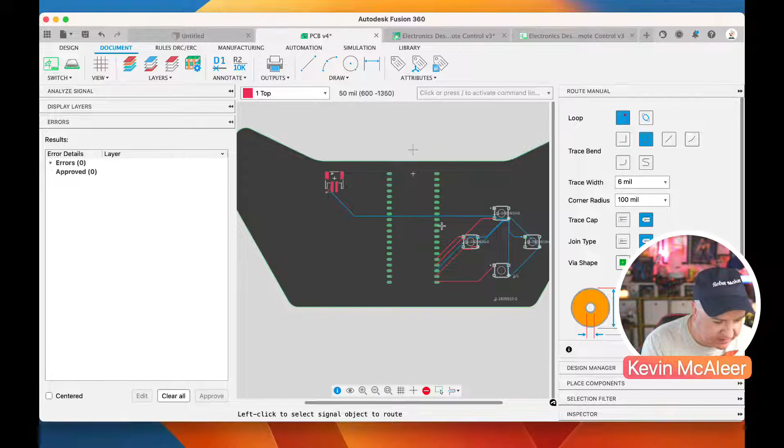So what I need to do is just put that little via there and then go back and then just create a new path between that and that there. And now that the error's gone, we're all good to go. So we've done our little wiring. Actually I think we're good there. We haven't connected up the plus actually. So what we probably need to do is connect up a wire between the plus on there and the voltage on the Raspberry Pi Pico.

So we could actually go back on to our diagram there, and we can connect that 5 volts to our VSys. So let's just very quickly do that. So we just name that to be plus 5 volts. It'll connect the two together. We can put a little wire there, save that, go back to our board layout, and we've now got that airwire coming from the VSys. So let's just very quickly do the route between that. So let's connect that to there.

Let's just run our design check to make sure we've not made any mistakes. Nope, no errors. That's what we want to see. Perfect. Okay, so now we've got that, we can now push this to our 3D design and see what this now looks like. I always think this is the most exciting bit because you actually get to see what this is going to look like in 3D. So press that. It's now going to repopulate. So don't worry that it says they're out of sync. You're going to see it now build up the PCB in front of our eyes.

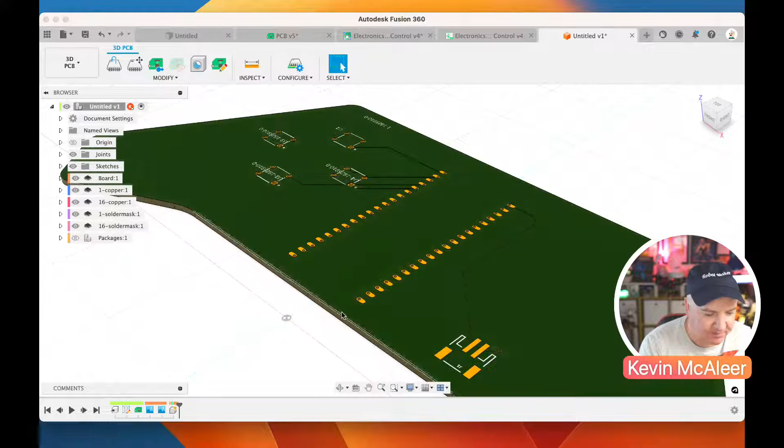There we go. So we can now see there are our buttons. There's our Raspberry Pi Pico. Ignore that little bit there. That's just because I used an existing model that already had some pins that were there. But we can actually hide the packages and just see the PCB itself. So you can see we've got a surface mounted JST-PH connector there. There isn't a 3D model for that, so it's just drawing a little rectangle. We can also see there's that weird glitch on the Raspberry Pi itself. But yeah, this is kind of our PCB. And we can go back and edit and put more things on and make more improvements.

So the last improvement that I will make, if I go back to push this to our 2D design, it's normal practice to fill the top and bottom of your PCB with a ground fill. And there's a couple of reasons for doing this. If I just click on the very edge there, click on convert to polygon and copy, we can then say we want this to be on the top layer. Let's click OK.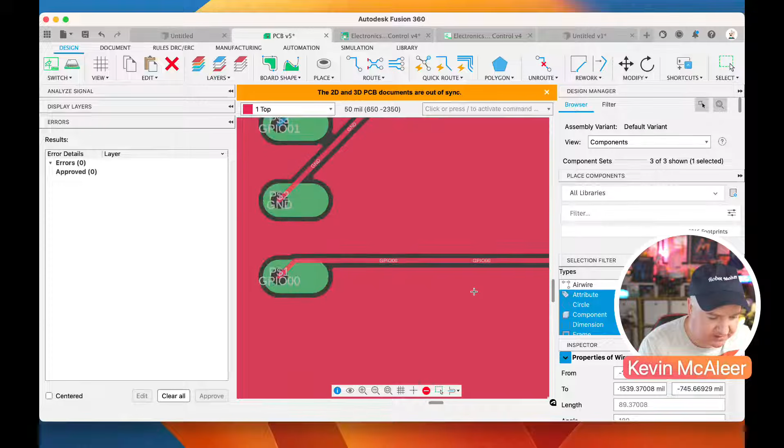And what it's now done is it's filled all that background with like a ground fill. So you can see we've got our little connectors, and everything around our connectors has got this ground fill. And we can do the same on the other side of our PCB as well. So we could go back to the bottom, for example, do the same there, convert to, oops, let's try and get that very edge, convert to polygon, copy to the bottom, click OK, and we've also got a ground fill on there as well. So there we go.

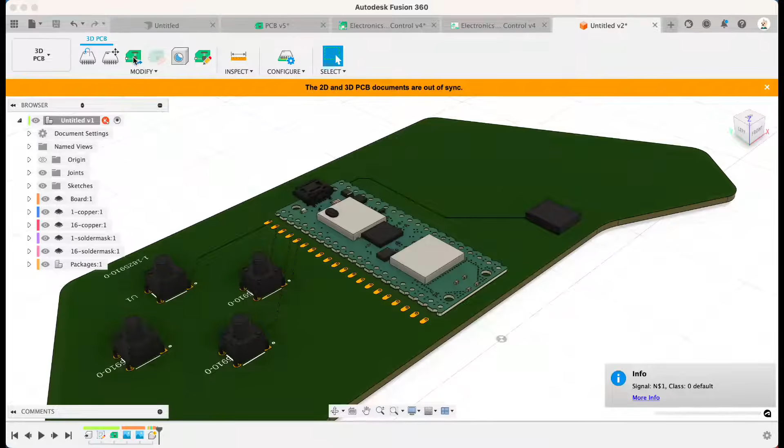And what we normally do at each point is we would save what we're doing. We would then push that using these push buttons, which is over here. Click on the push button just underneath my face. If I just hide my face for a second, if I jump back to that, I'll just have to wait for it to generate that again. You can see now we've got the ground fill on there as well.

Let's go back and push to our 2D design. When I click that button up there, push to 3D, there is a little push button here that I have to press that then pushes everything to the correct place, and it's kind of cyclical, you're kind of going round and round each time, updating one model to another.

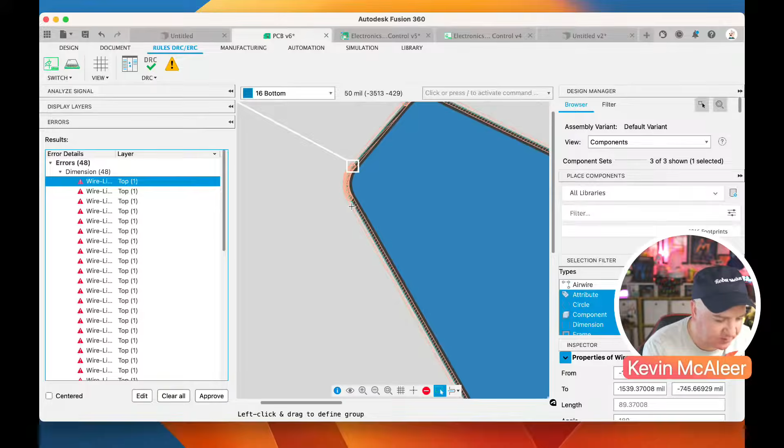Right, so say we were happy with this, this was our finished design and we were really happy with how this looks. We've run our design rule checks. You can only do this in the 2D space, you can click on this rules DRC, we can click on the check button there and it'll run all its tests. It's complaining there about some dimensions of some wires, so you can see there it's got all these weird things, and that's because we did that polygon fill. So maybe if I just undo that a couple of times, there, the error's gone now.

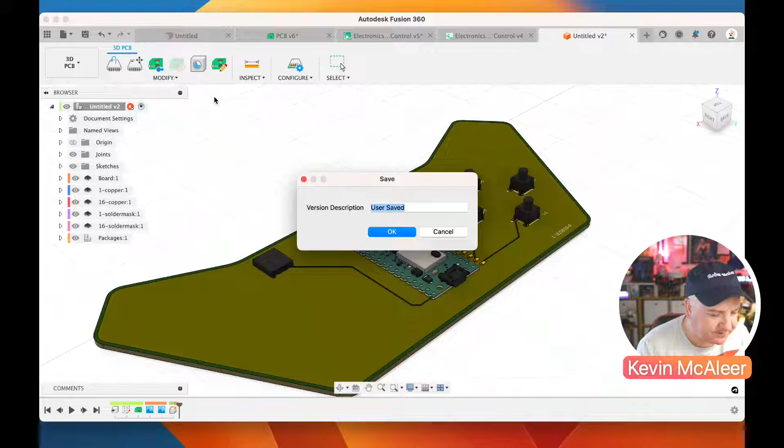We can just do that final push back. So let's just do that push to the 3D model, go back, and then they'll now be back in sync once it's updated that. So we can save that, click OK. We can go back to our 2D model, and now we can actually export this.

So we've got to manufacturing, we can click on this export Gerber, NC drill, assembly and drawing output. So if we click on that, look at all these files that get generated. We simply click OK, and it'll ask us where we want to save this. So I can call this one PCB from live stream. And there we go, we've got the PCB from live stream. It's a nice zip file.

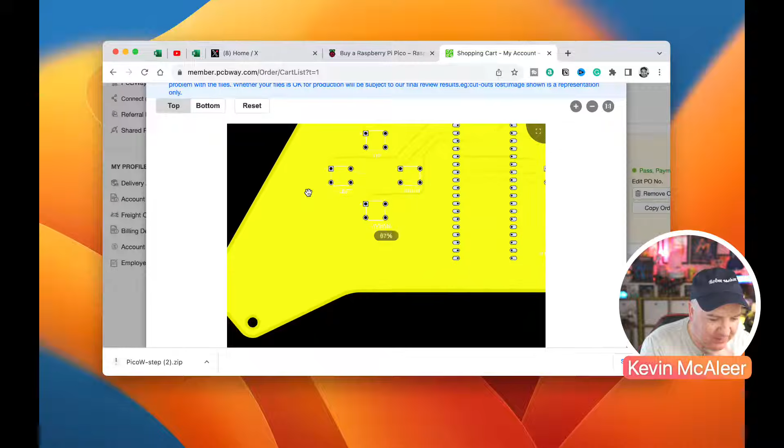So there we go. So this is one I created earlier. So I decided to go for like a yellow PCB. I created some mounting holes. We can have a look about how to do mounting holes. I've got a through-hole power connector on there as well. You can have a look on the bottom of the board as well. The yellow looks a bit yucky now in retrospect, but yeah, you get the idea there. We can click off that.

And then you basically just buy it and get it ordered, get it shipped to you. That one is like $38 for 5 boards manufactured, and it only takes a couple of weeks for that to come through.

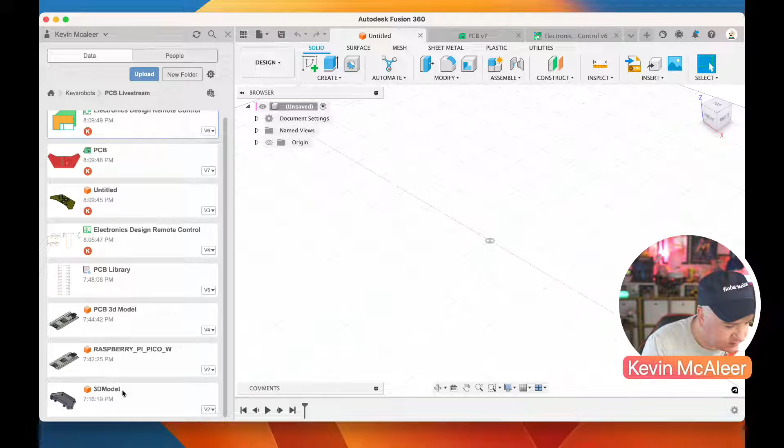So let's just go back here for a second. If we go back to our very original model that we did, which is probably under here, let's just find it. We called it 3D model. So let's go back over here, and that sketch that we created that we based everything from, I think it's sketch 2 there.

If I go and edit that, and I decide I want to add some circles to this, I'm just going to add a circle right on that point there, that one there, that one there. I'm just being really rough and ready with this. And these circles are going to be like 3mm, whatever.

Let's just get rid of that. I was trying to get that edge there. So that's going to be 3. That's going to be 3. That's going to be 3. And that's going to be 3.

We now finish this, we now save this. This will trigger that there's been an update to this file. We now go back to our electronics design and find the PCB board layout. So let's go for that one there. It should detect that there's been a change to that design.

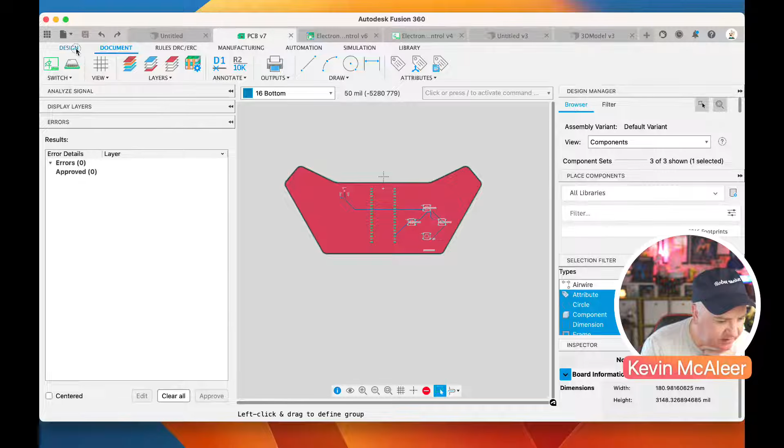Maybe I need to go into one of these. I think it's the 3D version actually, isn't it? Yeah, see at the top now it says the component is out of date. So I'm going to click on that, and that sketch is now going to include those mounting holes. You can see that we've got those little circles, and there's a button here that says PCB hole.

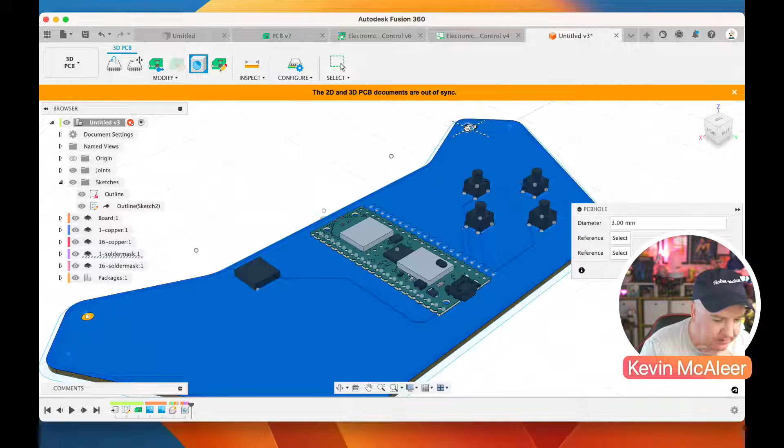So if we click on PCB hole, we drop it on there, we say that it's 3mm in diameter. We can basically do that the number of times that we want, and if we click on the board, it will actually lock to, it'll snap to that. You see how it sort of snaps to that location there? That's because we drew that circle on there.

Let's just do the rest of them. So let's just draw one on the board, lock it to there. Okay, and then the final one just over there. Click, drag, no, drag the wrong thing there. Let's just drag that there and make it 3mm.

And we're done. Right, so we now push this change, save the file, push the change. When we go back to our 2D model, you'll notice now that we've got the holes in it. So we can now just save that, click OK.

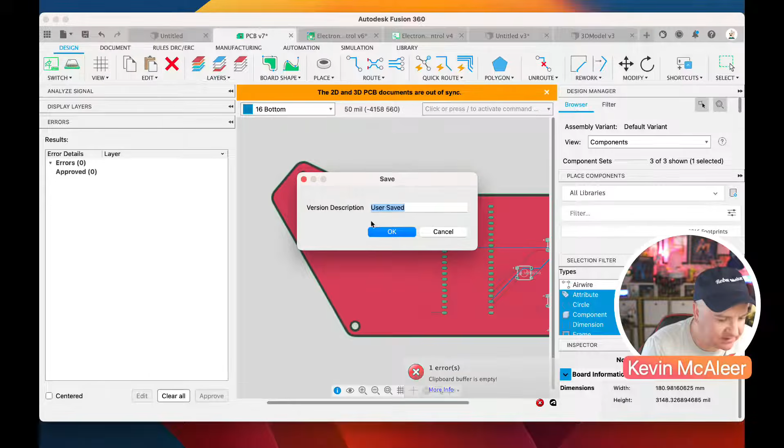It notices that there's a change here, so it insists that even though you made the change in the 3D environment, you have to then push it back to the 2D environment to keep them all in sync. I do find this a bit silly that you have to keep doing this manually, but this is how it works. So now it's happy that they're there.

It's going to regenerate the file, and if we now save that, click OK, and go back to our 2D space, then it's now happy that we've got those mounting holes in there. So we can actually mount our PCB correctly to our 3D enclosure.

So that's pretty much how you do the whole workflow end to end. Just over an hour it took us to do that. Now obviously there's a lot more to learning electronics than just placing components, but a lot of the time when we're building things like this, we are working quite simply. It is more just like a breadboard, but we're extending things and putting routes in rather than having DuPont cables connected on our breadboard. So there's a little bit more to learn, I guess, than just learning the software.

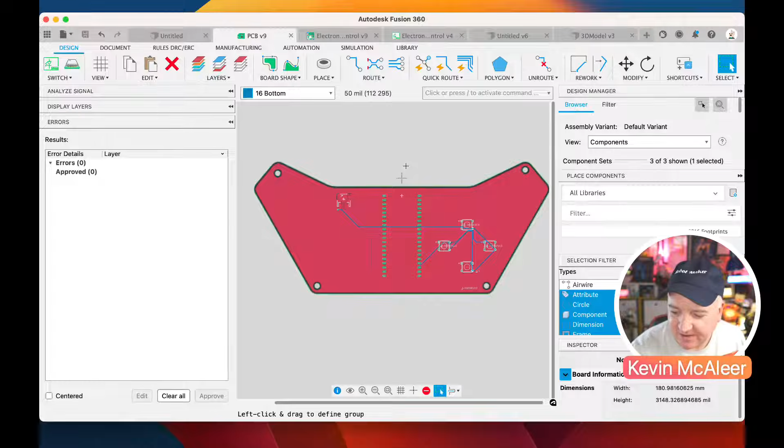And it does look a bit overwhelming at first with all those things, but what I've covered there today is the basics of it. It's everything that you need to get up and running there. So let's get back over to our keynotes and see what else we just need to cover off.